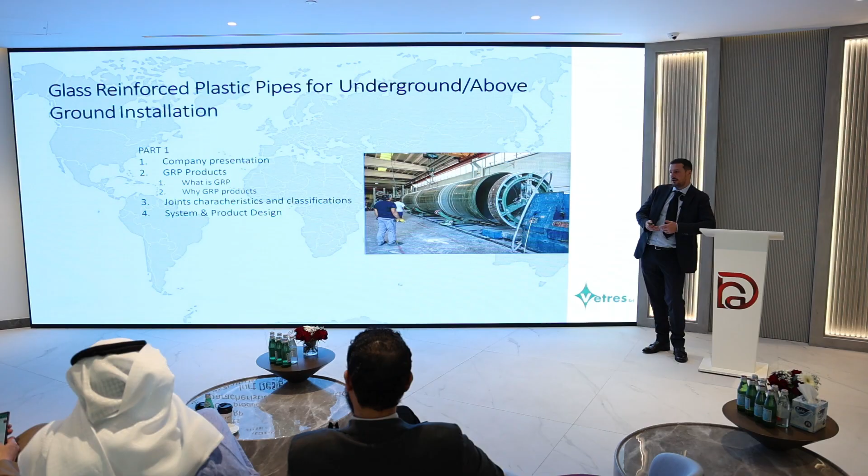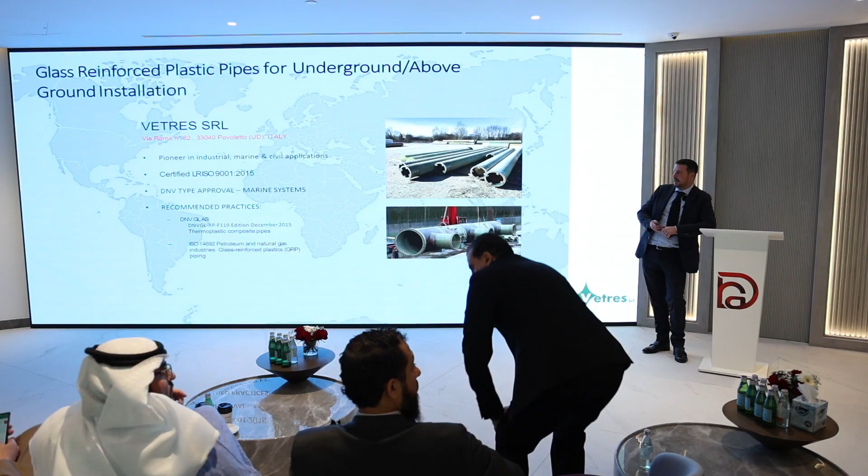For public network fields or cooling water in the plants, or the heart of the plants with chemicals, acid, and other kinds of liquids. We supply in the Middle East a lot of our materials, especially with Dream Gulf. We supply to Metito, and we have ongoing orders with Metito for a desalination plant. We made the Burullus plant with Orascom together with them.

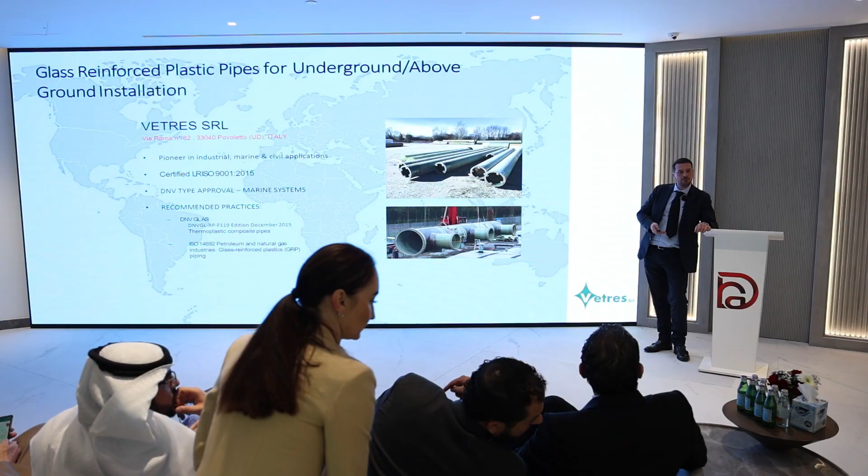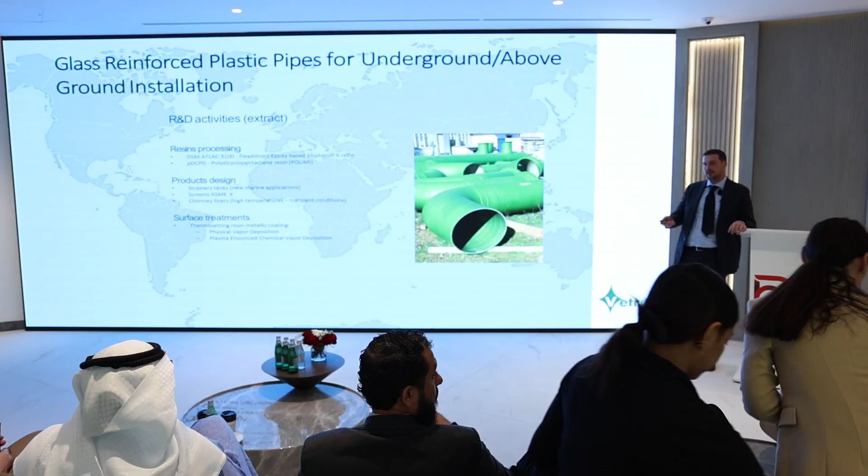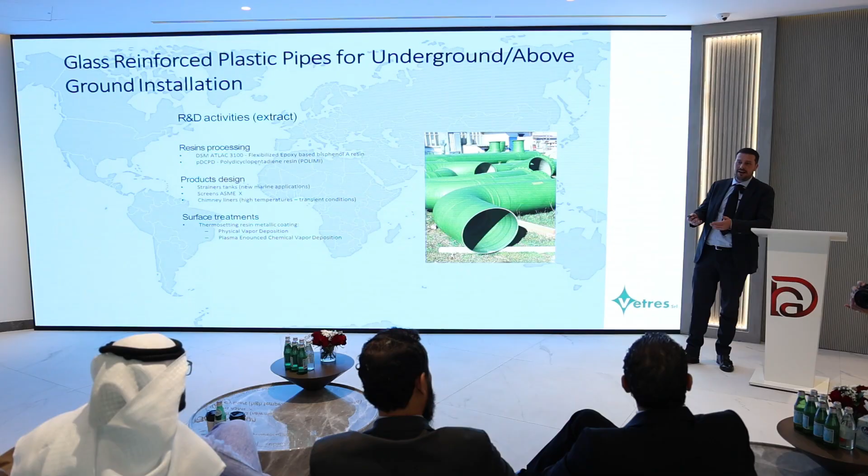We use different types of resin, depending on the request of the customer based on the liquid that goes through the pipes or tank. So we can use resin for water, like isophthalic resin, or resin for chemicals that are vinyl ester resin, and we can use also epoxy resin that is more common in the Middle East.

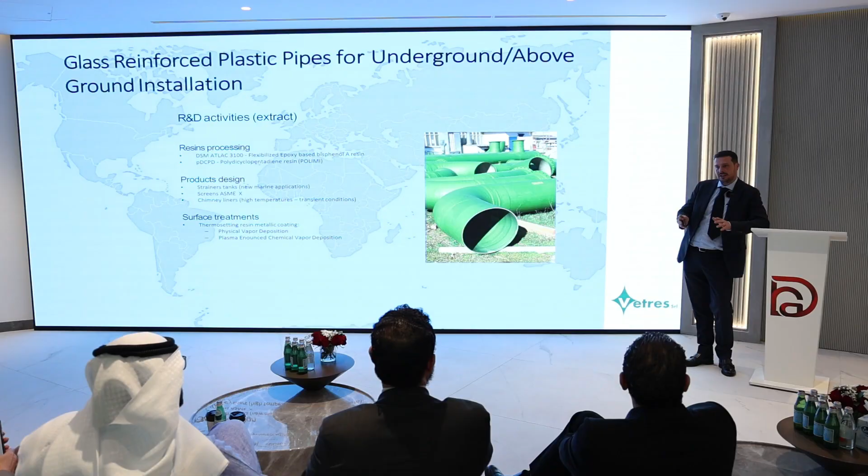We have everything inside our company, so the design is made by us inside the company. We have degree engineers that can develop the request of the customers. On the GRP side, a lot of engineering companies, also big contractors, do not have so much experience or knowledge on that kind of materials. So the big companies were asking also for GRP companies who can help them in engineering.

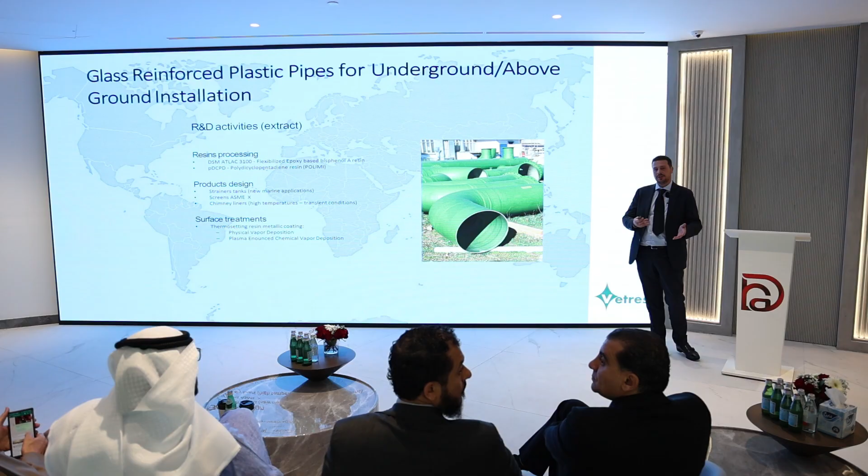So sometimes we make workshops inside the big customer's facility to understand how to use GRP or where to use GRP.

Okay, this is the kind of product that we can supply. Our must is the bell and spigot joints. The bell and spigot joints means that manpower specialized to make the welding is not needed, because with the bell and spigot joints, it's just a matter of inserting a male into a female with a double O-ring and a key-lock.

Usually with GRP, the worst thing, let me say, is the welding on site, because you need specialized manpower. Maybe you need to move chemicals from our factory to the other part of the works. But in this case, we avoid this situation with these joints, which are mechanical joints. So it's just a matter of inserting a male into a female. It's a much easier and quicker thing.

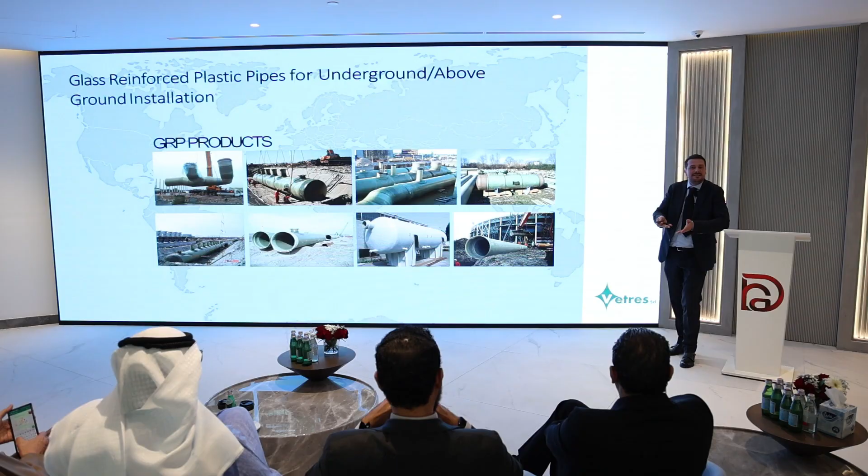The GRP can have a lot of names and acronyms, but at the end it's the same material. Usually in North Europe it's called FRP, fiber reinforced plastic. Usually in the Middle East it's called GRP or GRE. But at the end, it's the same products.

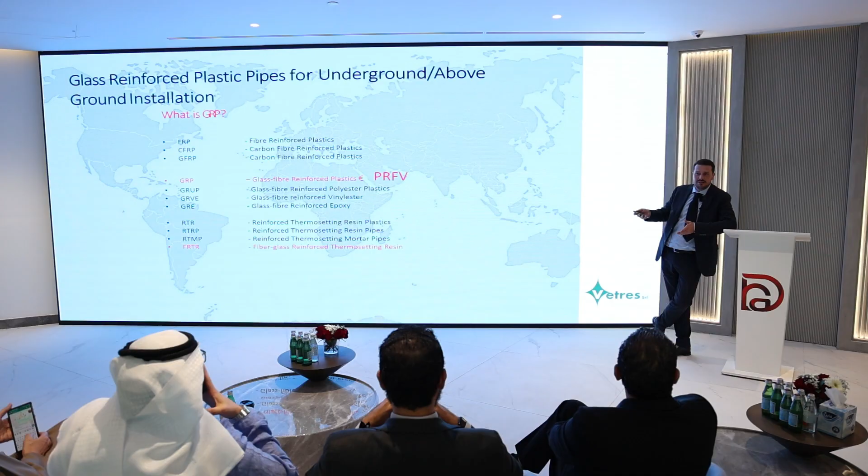GRP is a composite material that can reach today mid to high temperatures, because before, GRP was used just for ambient temperature or maximum 60, 70, 80 degrees. Now with new resins on the market, we can reach up to 140 degrees.

Because the most important thing is the HDT of the resin, that means the heat distortion temperature of the resin. And now on the market there are resins with an HDT of 180 degrees, so that means we can reach 140 with this kind of resin.

Usually the most common resins used are vinyl ester, epoxy, and isophthalic resin, as I told before. Isophthalic resin is suitable till 50, 60 degrees. Vinyl ester resin is suitable till 80, 90 degrees. And then there is epoxy Novolac resin that can resist till 140 degrees.

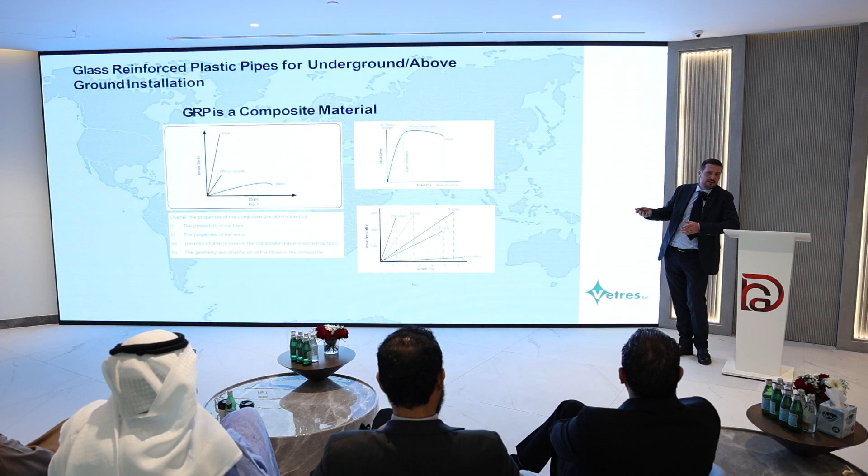Also, now GRP with the glass reaches very good mechanical properties, because now between GRP and carbon steel, the difference in mechanical properties is not so far away. We are very close to carbon steel, to metallic materials, let me say.

And also the advantage of GRP is the weight, because the weight of GRP is 1/4 of carbon steel. So we can give our customer the possibility to save a lot of money in terms of lifting equipment on site, because you don't need big cranes or big lifting equipment, as the material is not so heavy.

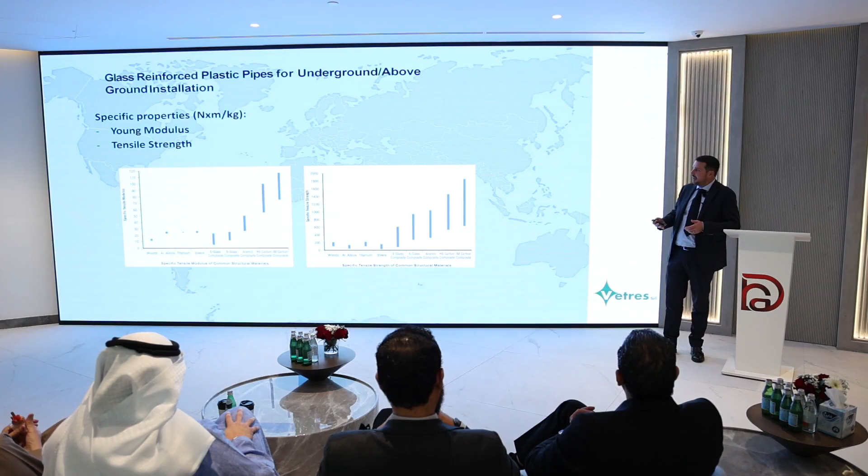But you can maintain the same characteristics as carbon steel without losing any mechanical properties. The GRP products are, let me say, the best solution for corrosion allowance, because you don't need extra thickness on the GRP for corrosion.

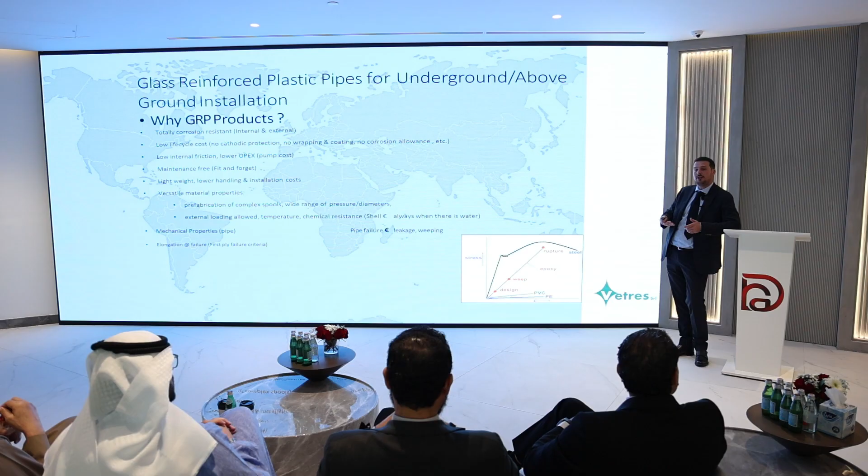As in metallic materials, before the pressure, you have to choose the thickness for the corrosion allowance. On GRP, this is not needed, because if the GRP resists, there will be no corrosion in this kind of material. Also, GRP does not suffer from cathodic issues underground, so cathodic protection with GRP is not needed.

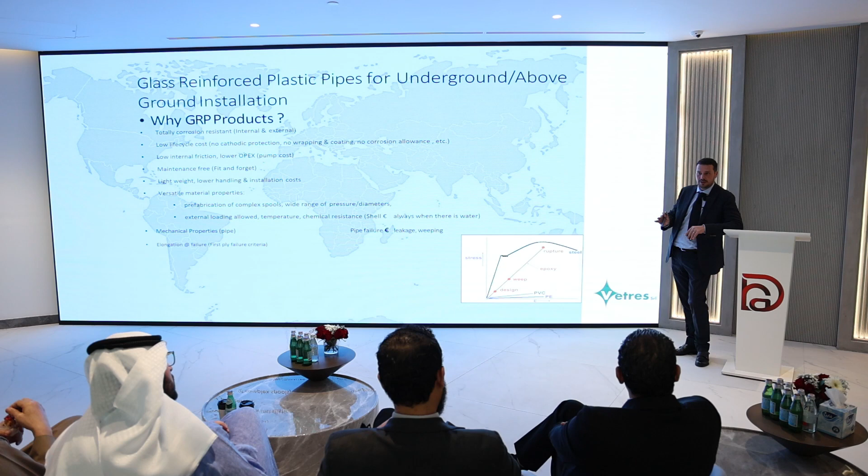So all these advantages with this material, if you give a 360 degree look at it, can provide advantages in terms of money and efficiency, because GRP is designed to resist 40 years. So if you install the GRP properly, as the Shell DEP is our most important norm to produce GRP, provided the company designs, constructs, and supervises the installation, the GRP can resist 40 years, and you can forget about this material, underground or above ground.

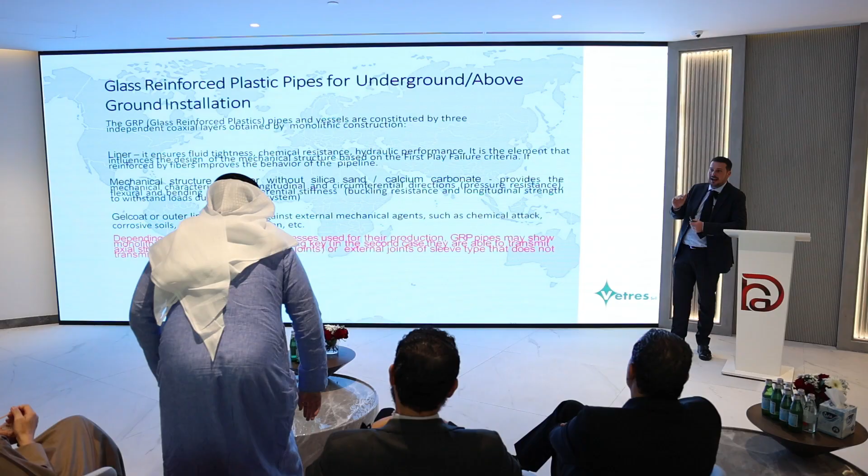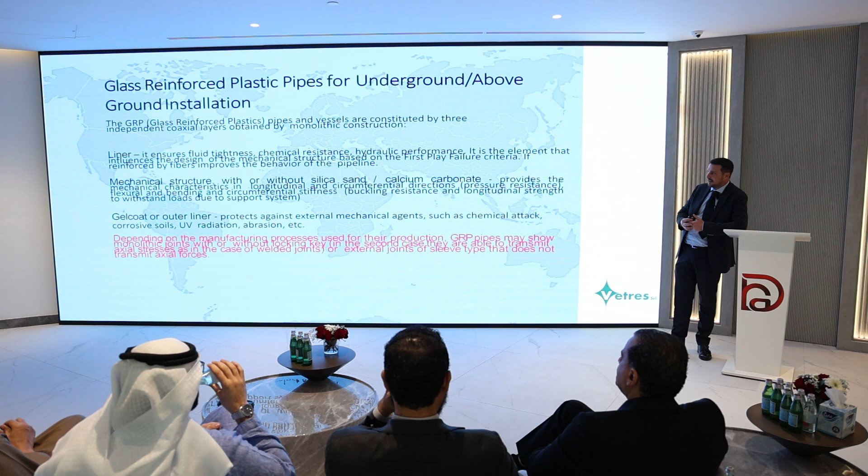The GRP pipes or storage tanks are built in three layers, let me say. There is the liner, that is the corrosion barrier, then there is the mechanical structure, and the external liner to protect against UV radiation, abrasion, and chemical attacks for above ground applications.

As I told you before, our must is the bell and spigot joints, as no manpower specialized in GRP welding is needed. But there are also other types of jointing, as usually the bell and spigot is for underground and for very long line applications. For the heart of the plant or for above ground applications, there are also the butt wrap welding or the conical gluing joints. This one needs specialized manpower who know how to do it, otherwise it will be a mess.

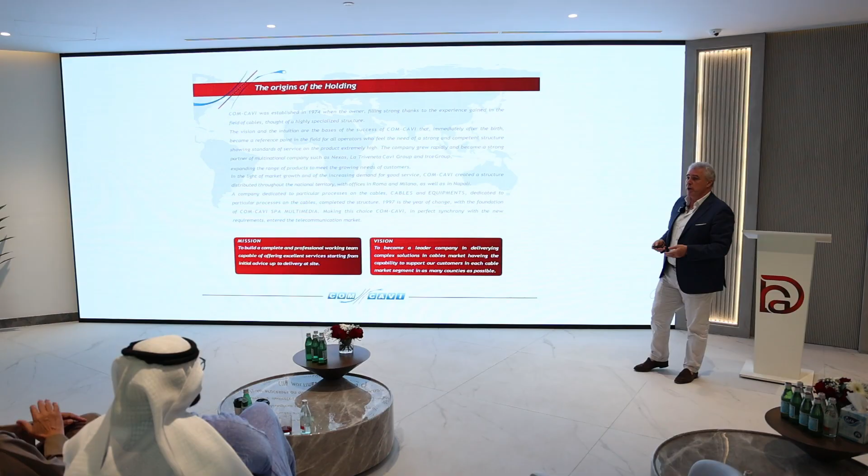My company is a family-based company, let me say. I am part of the property of the company. I'm the second generation. The company was established in 1974 by my father. It's a typical Italian company, all the family working inside. We are in Napoli, and we started working with one specific company in Italy, now it's called Nexans, a French company. We started as a partner of that company in 1974.

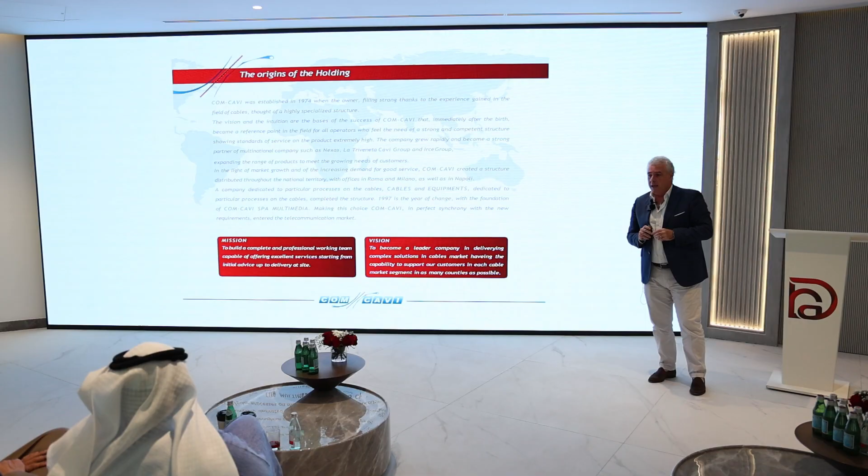But over time we developed our company, because we put our attention on the cable market. And what is the problem of the cable market? The problem is that the big factories don't have the variety of products. So we tried to go deeply into the variety, and we started working in several small fields with different kinds of cables.

This is our company all over Italy. The headquarters is in Napoli, where we stay, but we have some companies all over Italy. We are in Milan, we are in Rome, we are in Avezzano in the middle east of Italy, and we have some other small units selling all over the country.

Cables are for us... we start with cables for telecommunication and for small power, so for signal, industrial signal, up to extra high voltage. In this way, we cover all the fields, and some of these fields important for us are energy generation and transportation, and in the last 10 years, renewable energy.

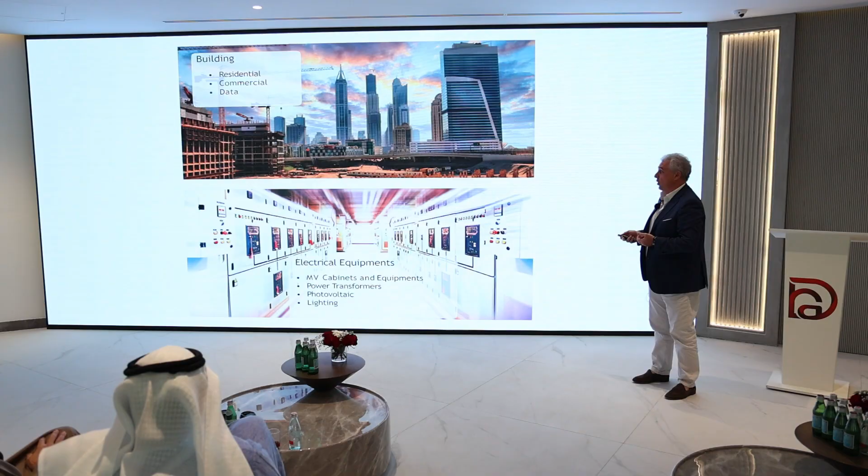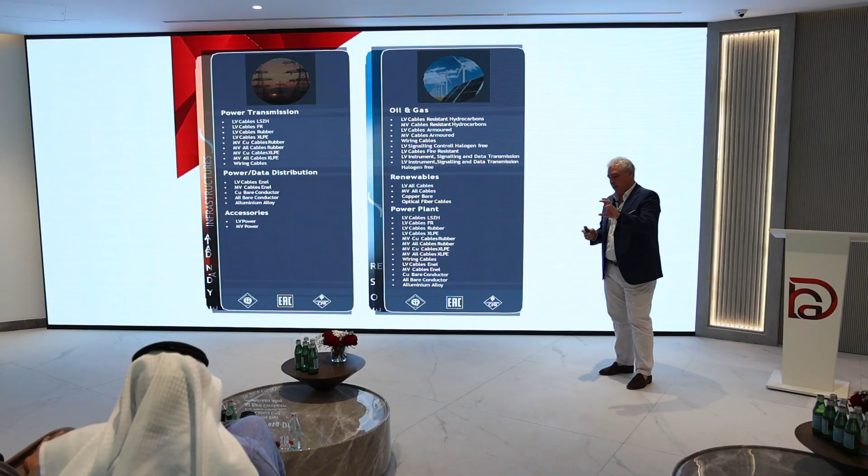Some other of our fields, I think this is Dubai, no? I don't know, seems so. For sure, our low voltage cables are installed in all the residential areas, fire resistant, and not only, everything for safety. These are our reference list in terms of cables that we can supply step by step in different areas. Power transmission, we have also the fire resistant cable for signaling, very well used in oil and gas, in the services of transmission of the pumps, all the valves and so on, all the signals. These are all the areas we are involved in.

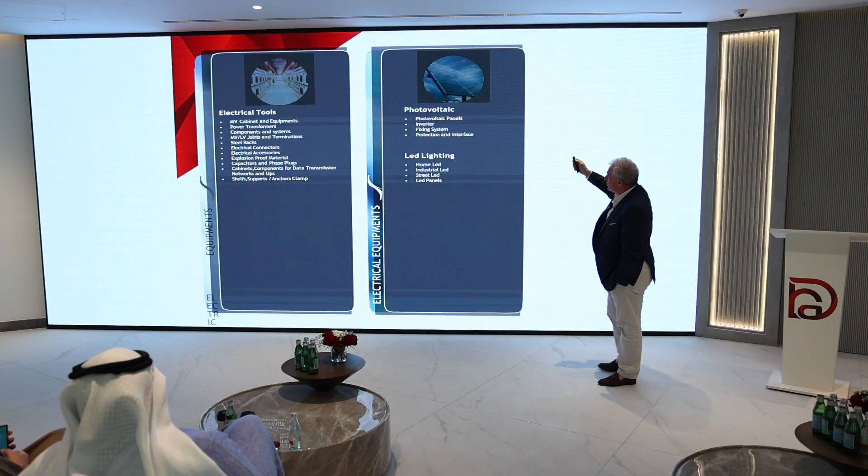Cables are wherever. So we have here photovoltaic, let me say. Also, we are involved in lighting because we worked on the renewing of the lighting system in Italy, changing the traditional lamps to LED lamps.

And these are the certificates we have. We have here, it's not shown, but we have also the approval for the Russian market. Even now, it's not so easy to work with them. We have the approval of the national grid, the Italian national grid, Terna. These are the approvals that we have for the cables and for our company, for the environment, for the quality, and all the certificates needed for developing projects all over the world.

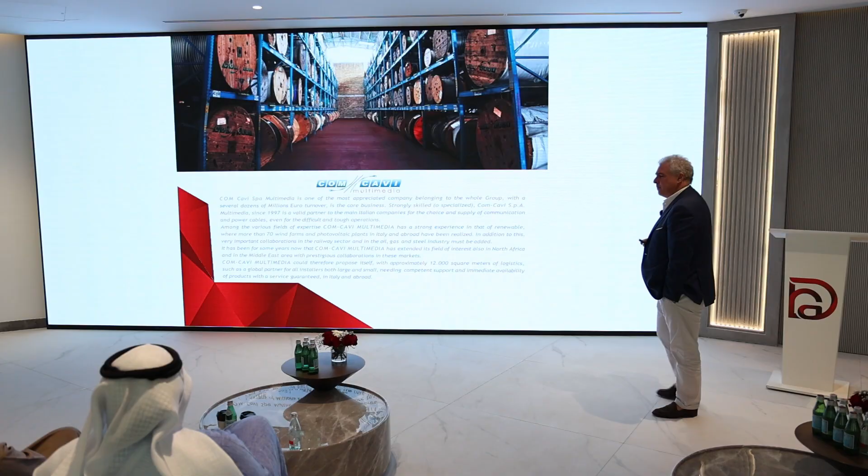We have stock all over Italy, more or less 20 million euros of cables in stock. One of our strongest points is that we are able to supply cables in a short time with a very deep variety. Our stock covers more or less 12,000 square meters. The whole system is equipped with barcode, so we can find drum by drum, even from my telephone. We can know which kind of cable, which size of drum, which weight, and so on, side by side, by means of our barcode, and we have everything in the system.

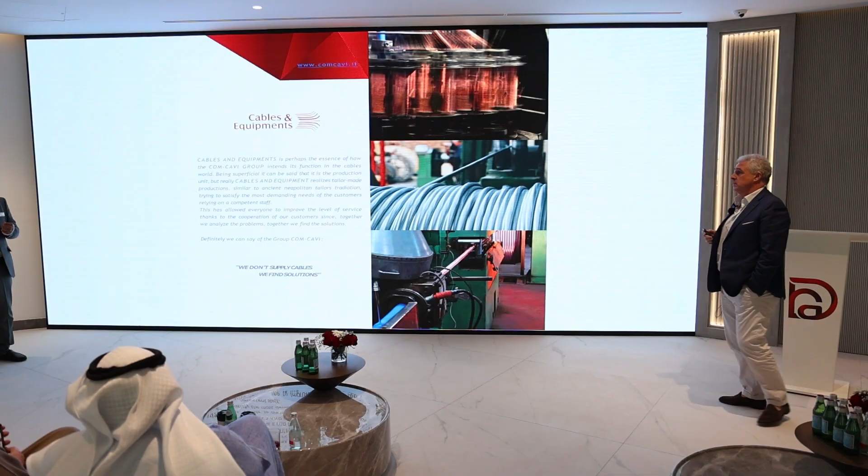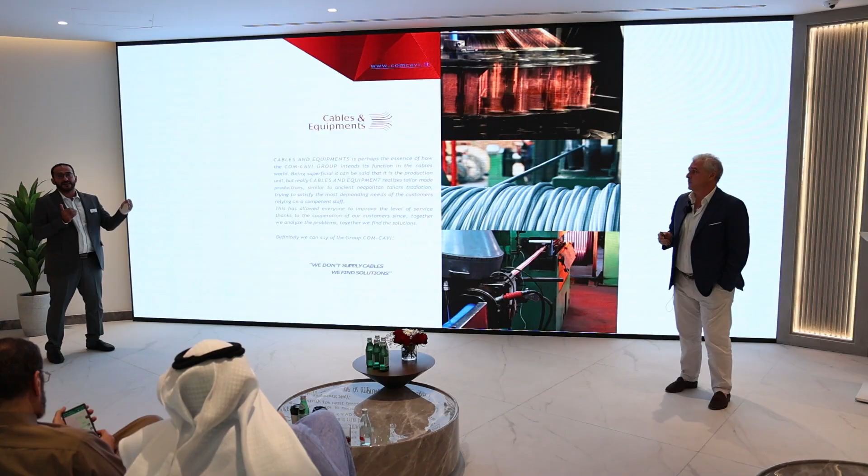Adding to what Mr. Latella is saying, the advantage of having stock cables ready for the customer's requirement gives us the leverage to do business of almost 5 million euros of cables in all the new electricity plants in Egypt since 2007 to 2020. We were involved. Then you will help me explain our project in Egypt, because no one can do it better than you.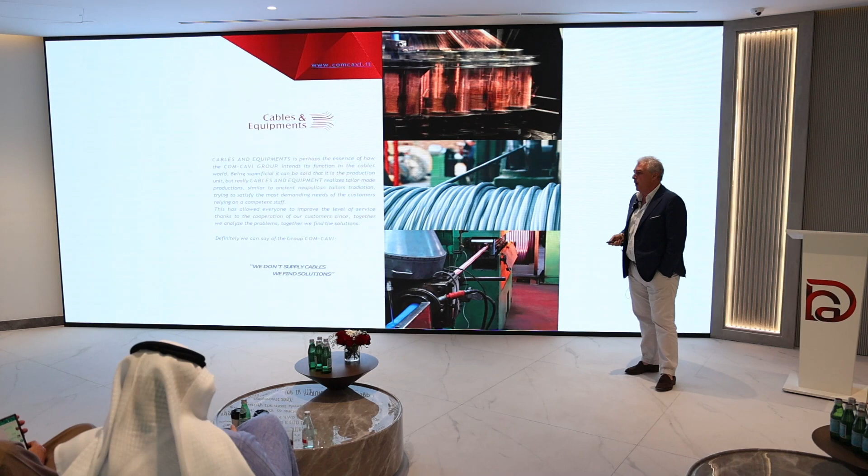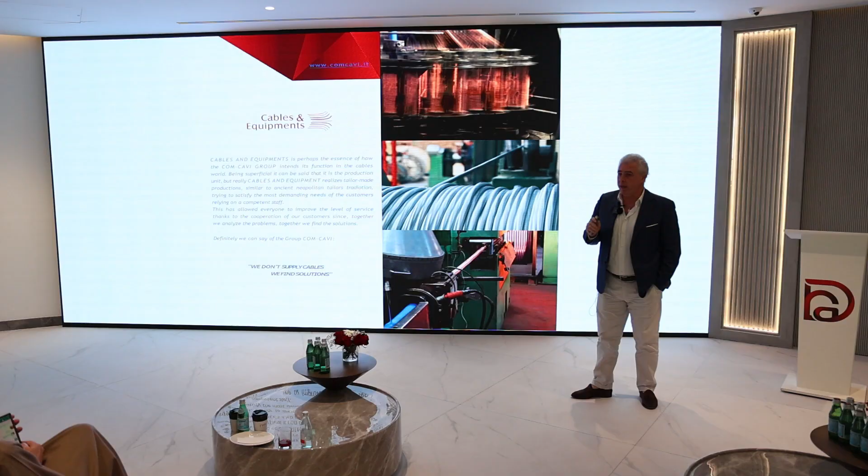We also have a special plant for manufacturing cables for oil and gas. At our site in Napoli, we make all the armored, fire-resistant, and oil-resistant cables that we supply to oil and gas companies. We do this in Italy with Eni, the Italian oil company, and with Sonatrach, the Algerian company, which has a plant in Italy. We also work with all the sub-suppliers of the oil companies, like Tecnimont, Techimp, and other companies in the oil and gas system. This is one of our most important fields, and most of our revenue comes from oil and gas.

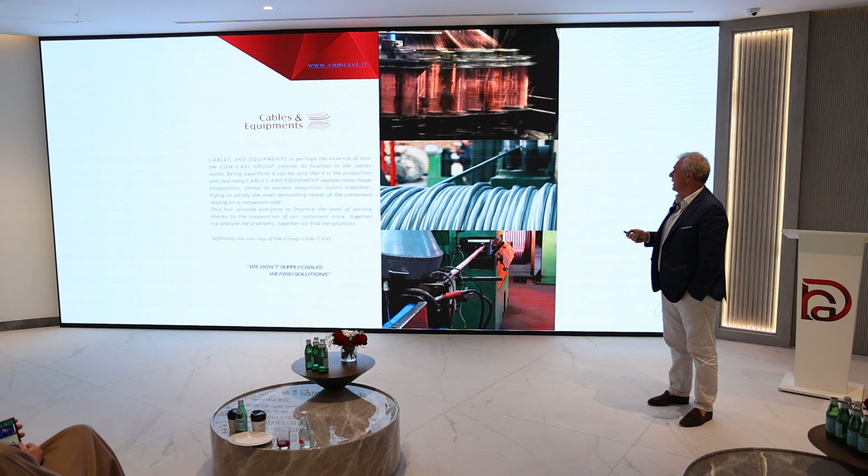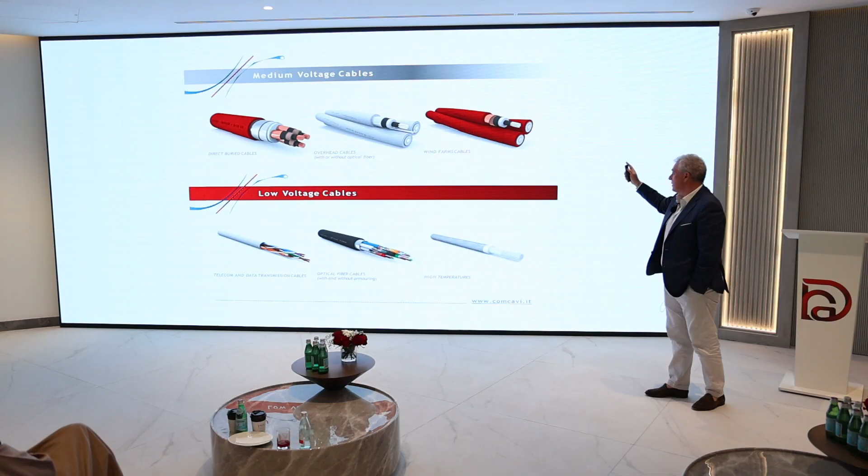This is a brief summary of the kinds of cables we have in our catalog: high temperature cables, optical fiber, telecom, medium voltage including for overhead lines, cables for direct burial, and wind farm cables. Also building power and wiring cables, halogen-free power and wiring cables for buildings, cables for solar plants used to connect panels to each other, and communication cables for oil and gas - single shielded, total shielded, armored and non-armored, fire resistant and oil resistant.

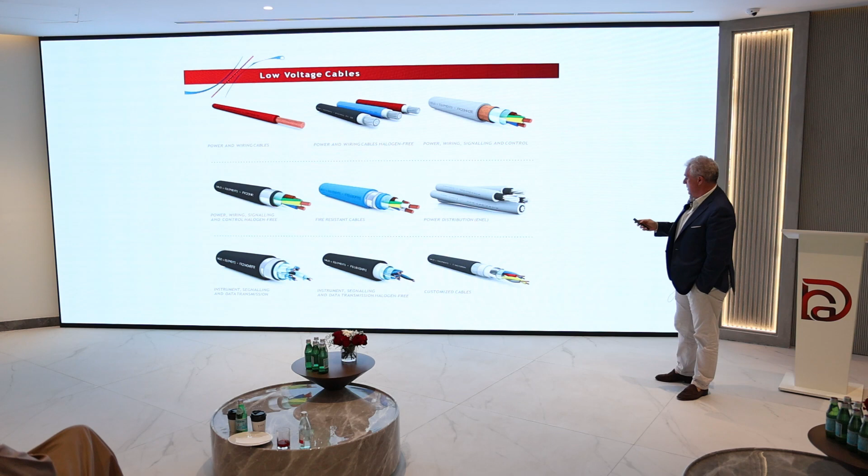Now, bare copper - excuse me, do you do undersea cables? Unfortunately, no. As you know, companies doing this kind of cable are not so common all over the world. We have a strong partnership with another company that does undersea cables, but we don't do that ourselves.

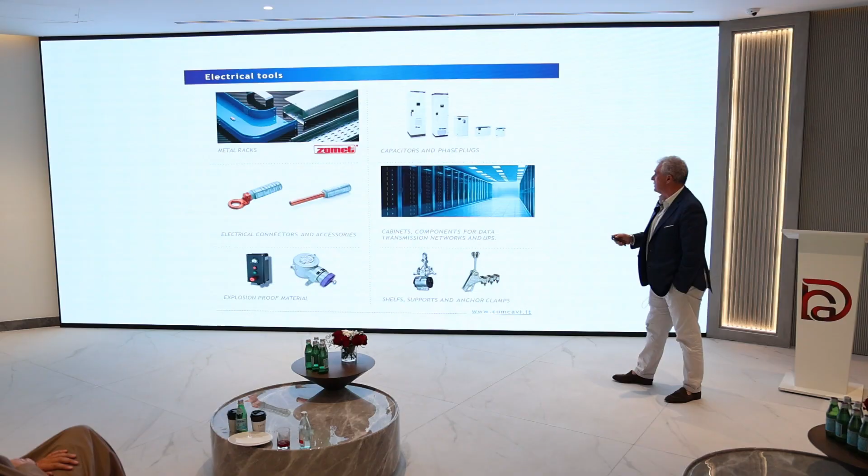For the Italian market, we also have another branch for some industrial equipment, transformers and so on, through partnerships with Italian manufacturers. This is because in Italy, when we go to the customer and supply all the kinds of cables they need, they usually also ask us to complete the supply for the plant. These are the equipment we have in our portfolio to complete a plant: joints and terminations for low, medium, and high voltage cables; cabinets; power transformers; cable trays; and explosion-proof material that we use in any project. Also all the lugs and metallic trays for the cables, solar panels, and inverters - that's what we use to solve our customers' problems, for the complete plants we deliver in Italy.

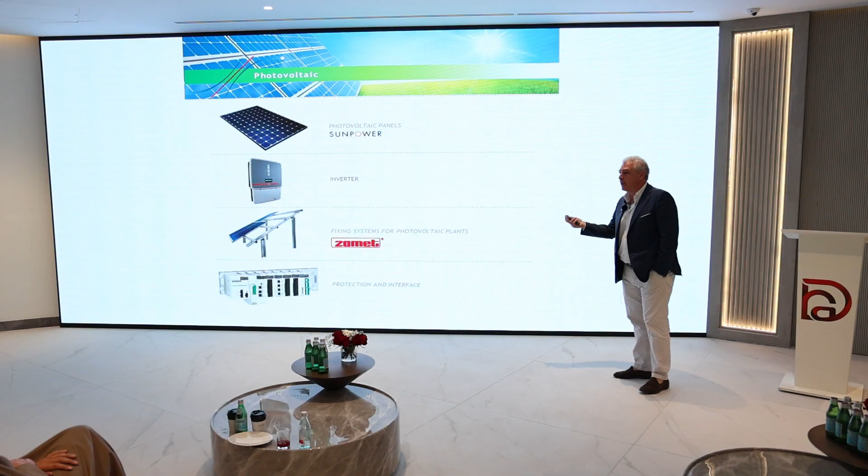With these solar panels, do you manufacture the cells as well? No, the cells are made in China, or Chinese. 95% of Italian manufacturers get the cells from the Far East, let's say. That's it.

Now we are starting to work with an Italian company making lithium batteries for some projects, and these batteries are made in Italy. This is a good opportunity, because in Europe it's very complicated to get this kind of battery. We are starting to cooperate with a local company close to us to make lithium batteries, in order to work on storage together with photovoltaic plants.